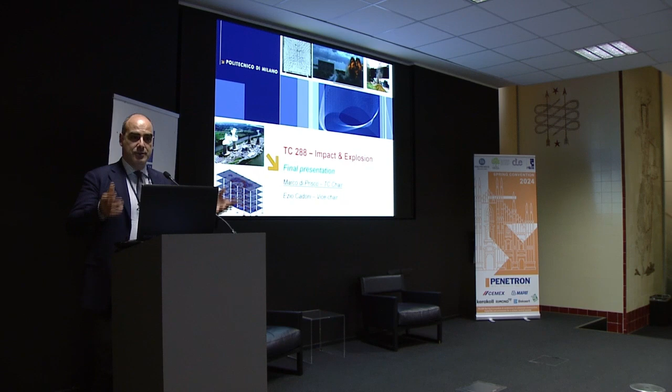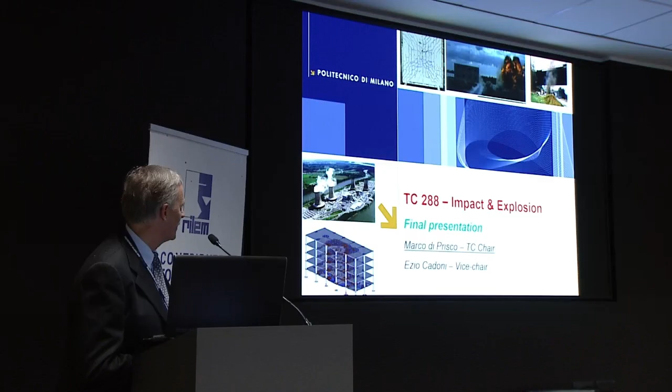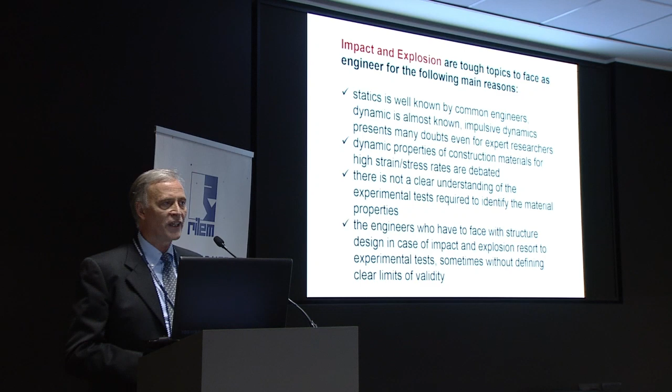And okay, I have the pleasure today to show you the job that we did inside of this technical committee. I would like also to emphasize the reason why it was born and which were the main outputs that we were able to create. First of all, looking to the subject, impact and explosion, in my opinion, everybody can immediately understand that they are a tough topic to face as an engineer.

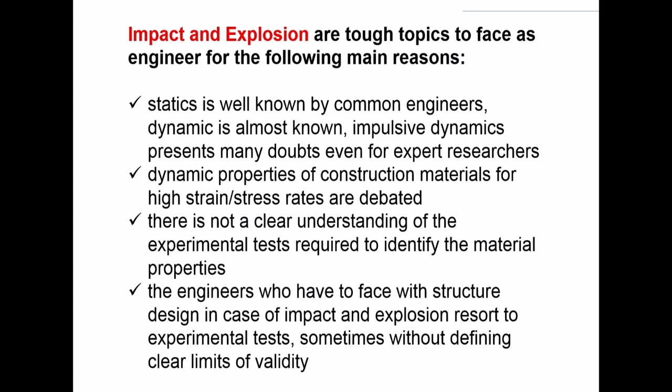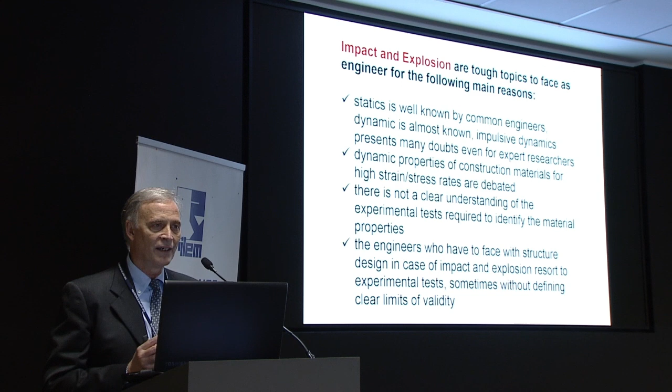And the main reason for that is that, first of all, there is relatively small knowledge, especially on impulsive dynamics, because everybody knows statics, or should know statics. Dynamics is quite well known, especially in a seismic region, but impulsive dynamics is very difficult and presents a lot of problems that are not even solved by the experts. Dynamic properties of construction materials are also strongly debated. So we are wondering what we can really identify starting from the initial test.

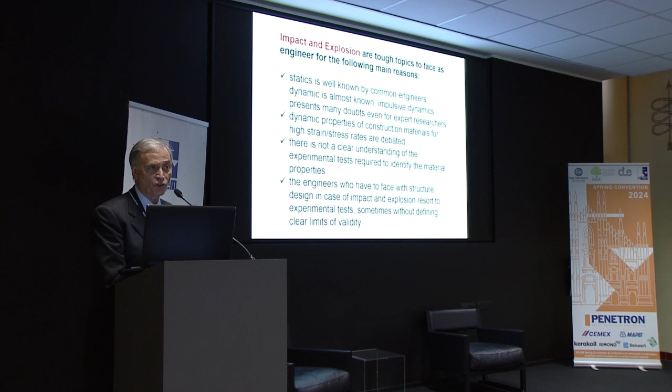And this is, as I will tell you in a few slides, for instance, one of the main problems we discussed, related to the DIF. The DIF is a ratio between the property of a material in dynamics with a high strain rate and in statics. So we will discuss it a little bit.

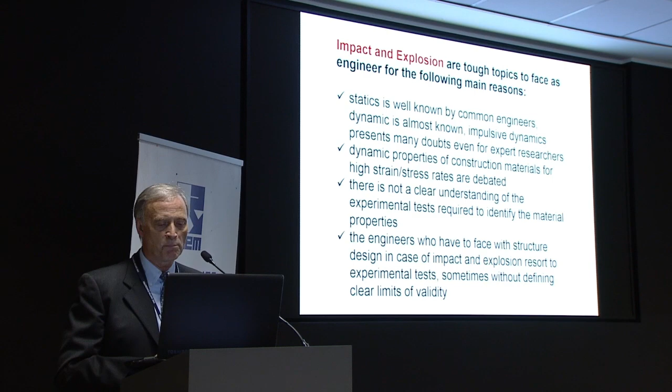And also there is a problem because at the end, as you know, the engineer has to solve the problem. So what does he do when he cannot have a reliable model? He tries. So he creates a lot of empirical laws, but in many situations, if you don't fully understand the problem, you are not able to establish the right limit of validity of what you empirically deduced. So these are the main reasons why, in our opinion, there was a need to create a committee on it, and in my opinion, RILEM could be a very good association to develop it.

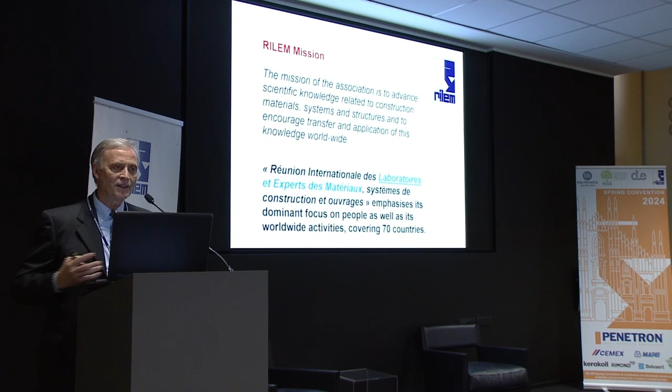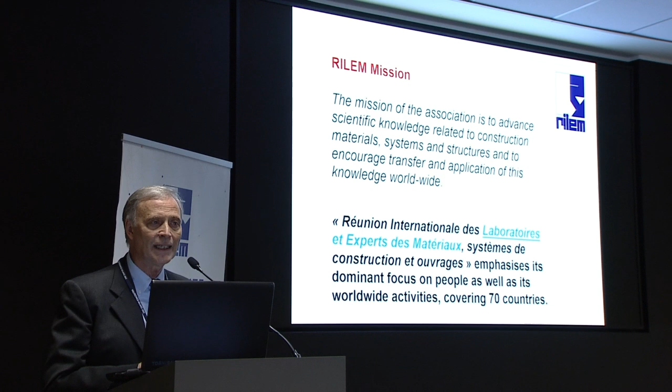I would like to remember, as Nicolas also did this morning, that RILEM is a réunion internationale des laboratoires et experts des matériaux, but des laboratoires aussi. So also laboratories. And in my opinion, until now, we developed a lot the union and the network of the experts, much less the network of the labs. And this thought was discussed with the DAC when I was inside, and was a starting point that convinced me that this topic could be a good matter in order to try to restart with the idea that RILEM could be also a good network of labs.

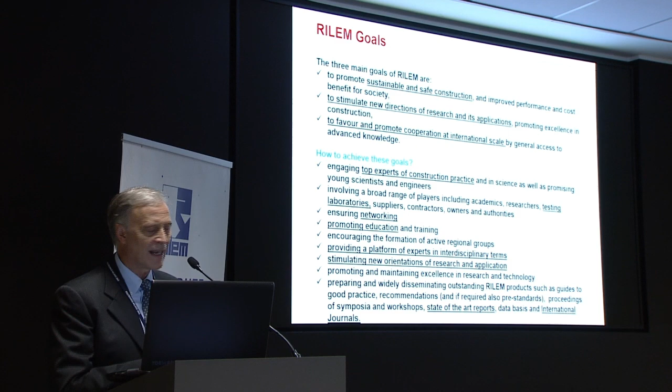As you know, the goals of RILEM also include testing laboratories, as you can see here in the underlined part. We have to promote education and networking, and we also need a way to create discussion. And what I see now is that everybody has much more money than in the past. We create a lot of experimental work. There is no discussion about it, so usually the test results are taken as they are.

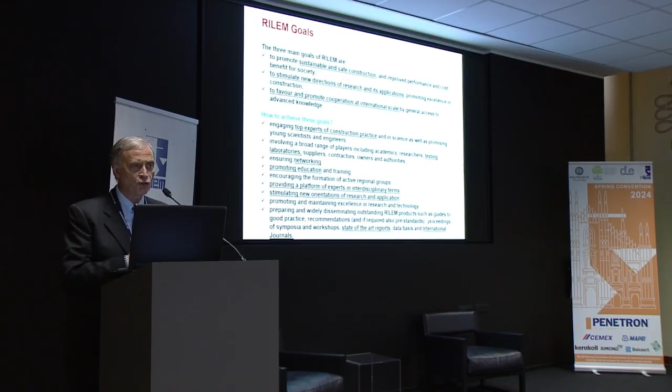In the past, we had much less money, and when I started to work in research, there was always a discussion of our job, and so the experimental results coming from one lab were discussed by everybody, because we had a much lower number of journals, and so everybody could be updated and could use the results coming from that experience. Now we create much more, but sometimes we don't have the time to read it all, and so there is a real problem with that.

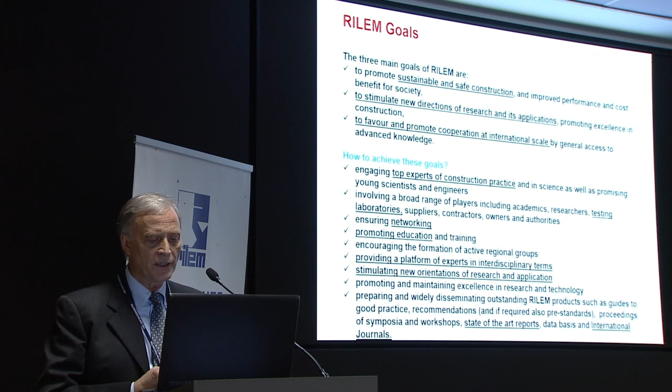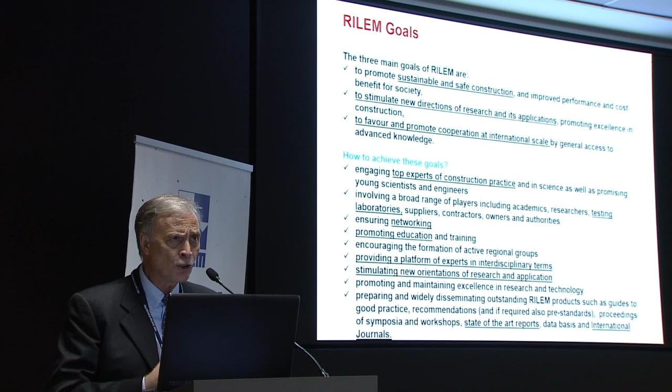And for this reason, in my opinion, RILEM should try to return to creating the network of laboratories, because instead of losing a lot of time to design a special device, as we need for such kinds of problems, it's much better to use the device that is already ready in another country. And in this way, we can also share our knowledge on the problem, and we can promote the final knowledge on the topic.

So at the end, we need to stimulate this idea and to produce state-of-the-art reports. Of course, we will also discuss that, because nowadays we don't have the best rules in order to do it. Sometimes you will be forced to produce many things only because every association would like to have a special publication in some special journal. Anyway, as you could see here, we started to think about creating a network between laboratories. So we proposed in the DAC meeting of 2018 in Delft to create this new technical committee.

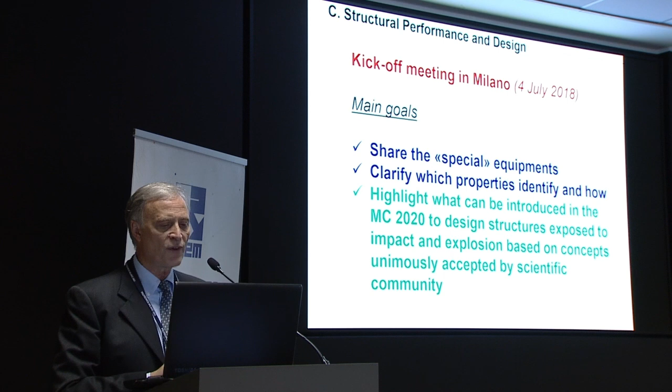And the main first goal that we announced in the kickoff meeting in Milano on the 4th of July 2018 was to share the special equipment. So I invited people who had special equipment, and we would like to discuss and clarify which properties they would be able, or they could be able, to identify with such kind of devices.

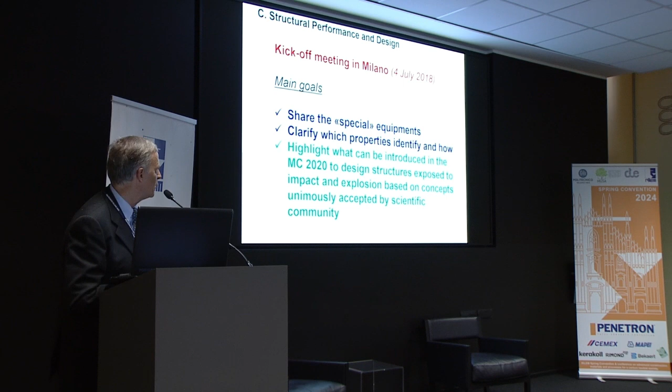And then there is also the need that, because I'm also a FIB member, I have the honor to be in the presidium of FIB, they need to create a new chapter in the Model Code 2020 on the subject of design of structures subjected to high strain load. And so immediately I thought that this could be also the good occasion to have a good number of experts that could verify if it could be possible to update what was written in the 2010 on this subject.

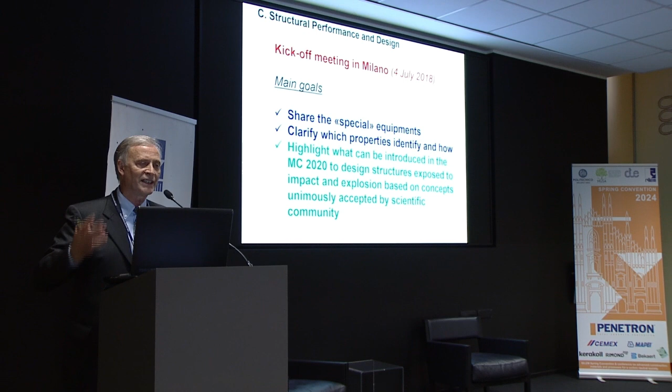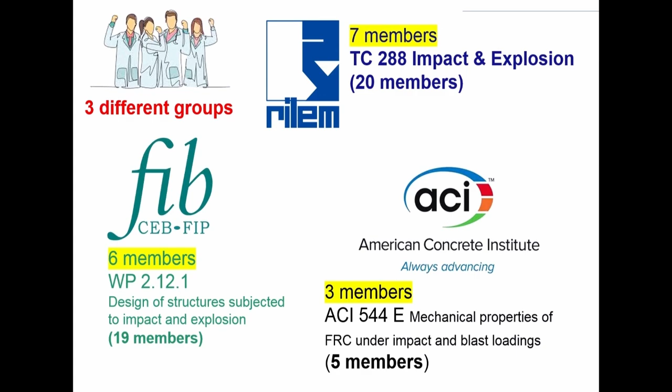Well, so at the end, I started to create a group that was not only represented by people coming from RILEM. You could see underlined the initial number of people of the 3 different associations that were FIB, ACI, and of course RILEM. And I would like to cooperate with all of them because I knew very good experts in the 3 worlds, but unfortunately they couldn't belong to all the associations.

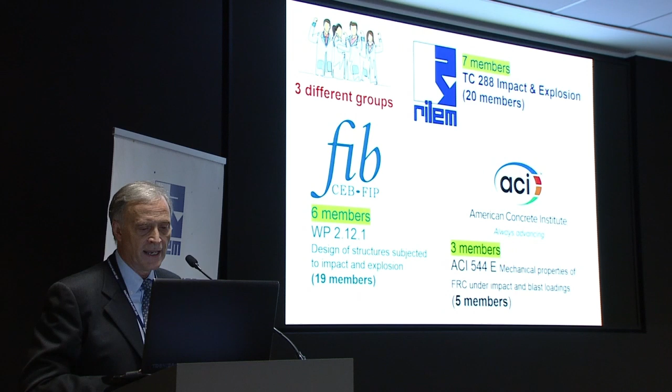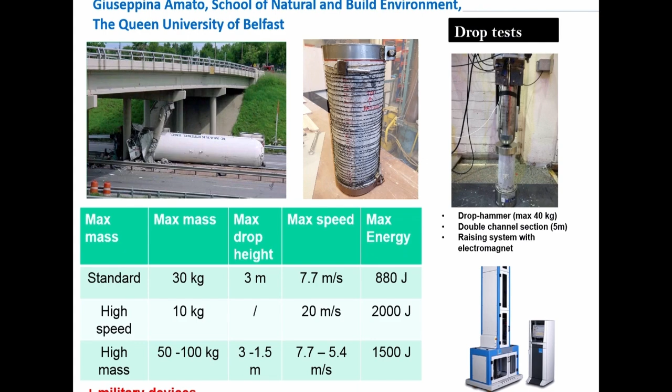So in the kickoff meeting, I asked the people to show the main problem they were interested in, and also which kind of devices they could have in their own laboratory. So for instance, we had this situation for Belfast, Queen's University, and you can see that there is a classical drop hammer. There is a double channel section, and the main problem they were investigating was essentially the impact against the bridge, so in this case the problem of the piers.

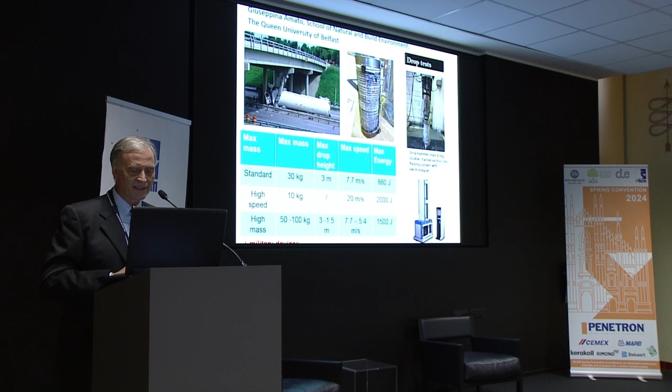And also they have some military devices, very powerful, but at the same time not so easy to use, because you know that when there is a military service, you need a lot of different guarantees in order to operate in this lab.

Then we had also Professor Ožbolt coming from Stuttgart. He was not only a very good numerical expert, because everybody knows him, I suppose, because he worked on a microplane model. He worked a lot with Professor Bažant, but he reached a fantastic level in order to study and to investigate a real problem like the anchorage, for instance.

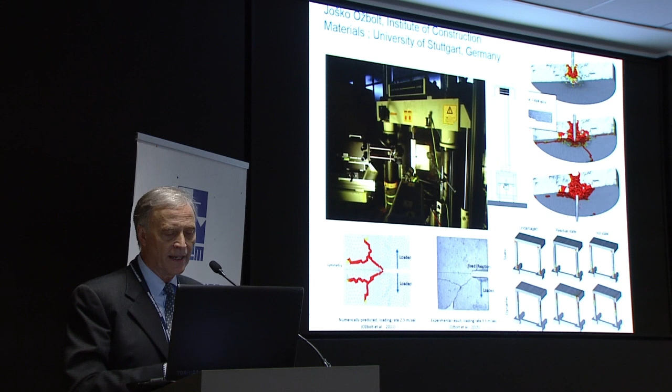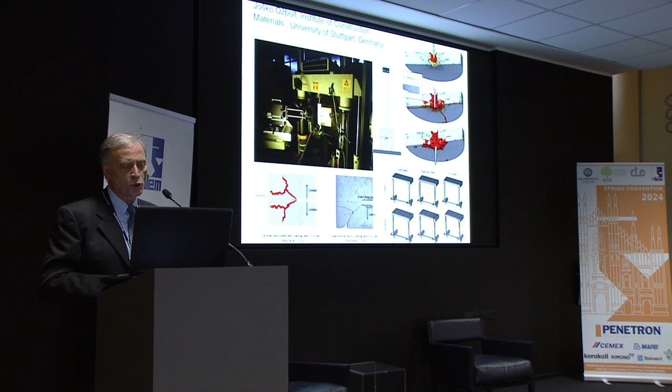And he was also interested in another problem that sometimes we have in the impact, that is a problem of fire and explosion. So, for instance, he did a fantastic job in India, trying to verify what happens if you hit a structure, so you create damage from the fire, and then you have also an impact. And I had the chance to follow this job as a supervisor of 2 PhD theses. And he has also a good diagnostic lab, working on the small scale, in Stuttgart.

We have the fantastic feature that mainly Matteo Colombo, who is inside with us in this room, designed with the help also of Paolo Martinelli. So a shock tube which is able to apply a shock wave coming at a speed higher than 2 Mach, and is able to apply a huge local pressure, essentially in the range of 1.5 megapascal, which is very huge, on a slab of about 50 centimeters, but changing the final part of this equipment, you can also enlarge the test.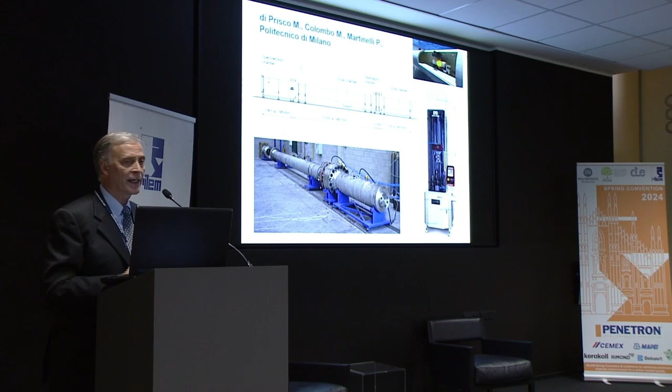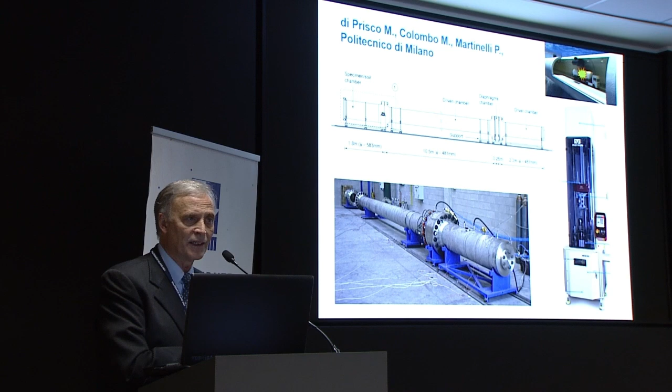And of course, this special device that we were able to finance due to an Interreg project on the safety in tunnels, it was also used recently to investigate problems like this. You know probably what happened a few years ago in Bologna. There was an accident where there was an explosion of a truck, and then there was a fall down of a span of a bridge. And we are interested for the same reason in what happens perhaps inside of a tunnel, especially if the tunnel, as we have investigated recently, is under the sea, as in Norway we are trying to do.

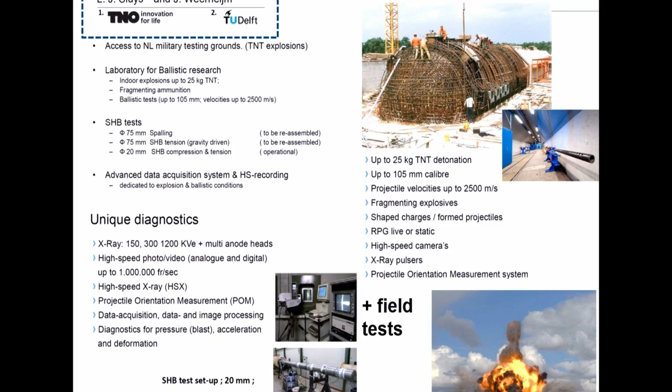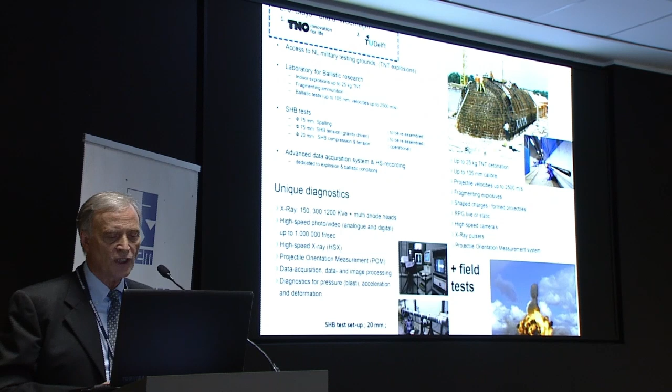And of course we have also a recent drop machine, but this is not really special, it's a market one. We have also the contribution of TNO. TNO has a huge lab. They have a very good diagnostic. They have a small Hopkinson bar, and they have also the possibility to do some field tests, which are very interesting, because they can use some devices in agreement with the military service.

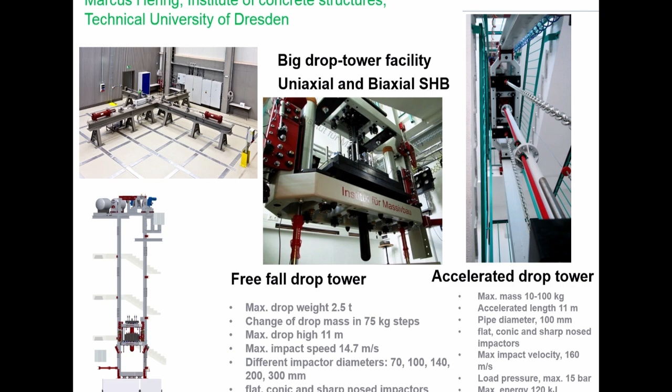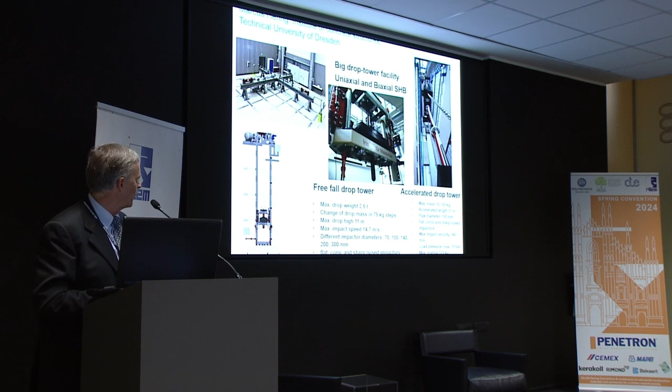Well, anyway, we had the contribution of Dresden. Dresden created a huge mass to use as the classical big drop tower facility. And it tested a huge slab for punching. So this is a very important device for the investigation on impact. And they have also a very important uniaxial and biaxial split Hopkinson bar that you can see here. Okay, it's not possible to see there, probably in this way. Yeah. And okay, so this is what they have in Dresden.

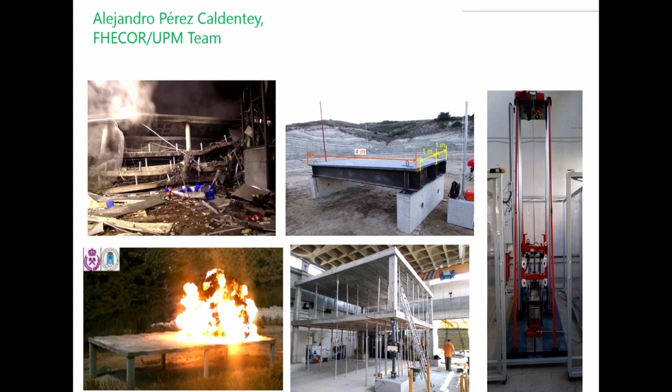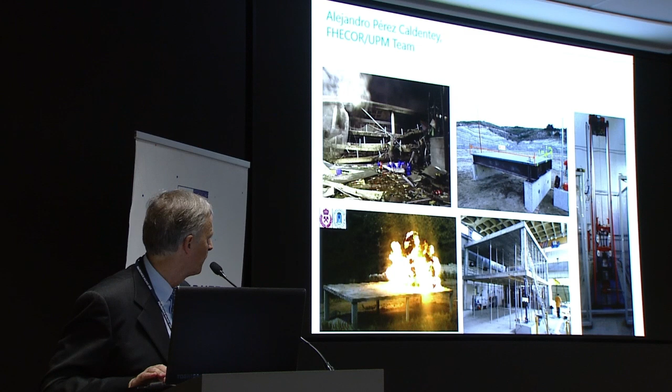And finally, we have also the contribution at the beginning from Madrid, where Alejandro Caldentey had the possibility to investigate real problems as engineer, but also full-scale tests outside or inside to evaluate robustness and the behavior after damage in fire.

So at the end, after this first kickoff meeting, we decided the final aim of our technical committee, essentially 5 aims. The first was to coordinate a database for special devices oriented to investigate impact and explosion effects on materials and structures. The second was to introduce state-of-the-art knowledge in a specific FIB bulletin, and so we did. Now we have a bulletin ready, and we will submit in a few months.

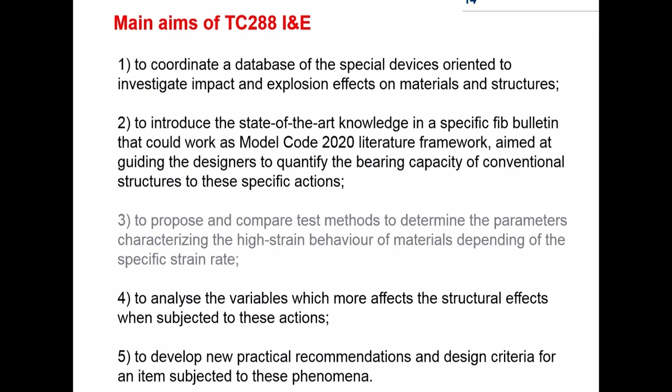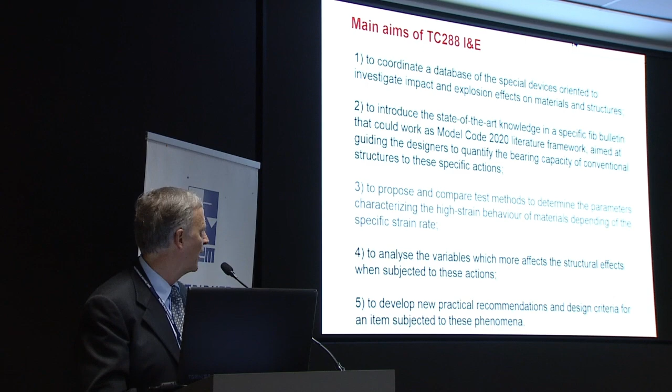That works as a framework for the chapter we wrote for the Model Code 2020. Then we had the possibility to discuss and compare different test methods to determine the parameters characterizing high strain rate behavior. We did this job with ACI 544, which is specialized on the behavior of fiber reinforced concrete used to protect structures. They created a very interesting state of the art, and we debated about it.

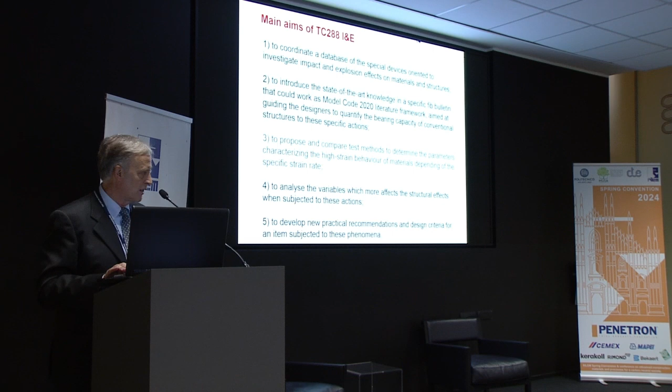We also had the possibility to analyze the variables which most affect the structural effects, and this was essential in order to select the right procedure or the right level of design to adopt in different situations. And finally, to develop new practical recommendations and design criteria. This is something we propose at the end for RILEM, and we have already written it, so we will submit the state-of-the-art to Materials and Structures in a few days.

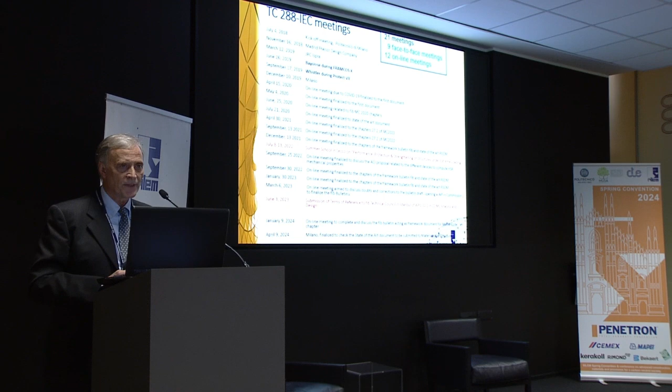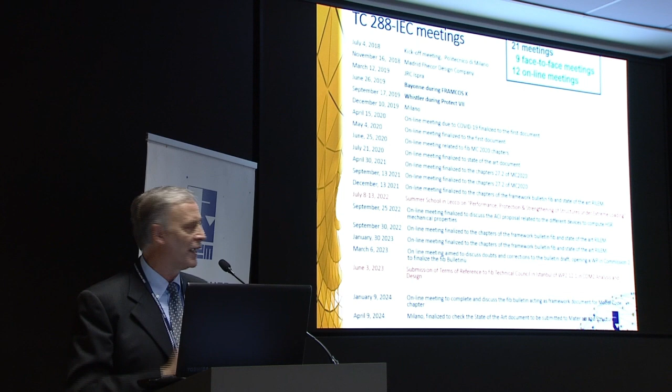As you can see, we did a lot of meetings, especially at the beginning, in order to best clarify the aims. Globally we had 21 meetings, 9 face-to-face, then there was the pandemic, so we started to use online. Now I'm convinced that for a technical committee it's a good idea to have one face-to-face, perhaps here, and one or more online, because otherwise the cost of our technical committee is too high. And if we look at the sustainability of this type of organization, in my opinion this is the best approach.

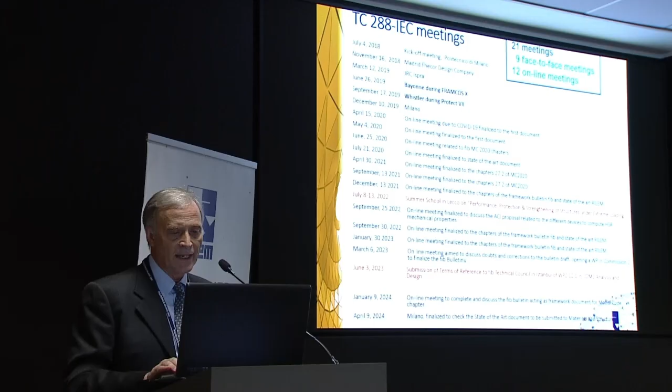We arrived at a global number of people which was more than 40 people globally. A huge job was carried out by Ezio Cadoni, who served as vice chair of this committee, and is a very good expert in terms of high strain rate behavior of materials.

We started with the first output, the idea to create a network of labs, and we produced in 2020 a first report where we were able to describe 27 different devices that could be useful to identify the high strain rate behavior of materials. We created a document where you can see for which kind of problem this type of device was used, with references, of course.

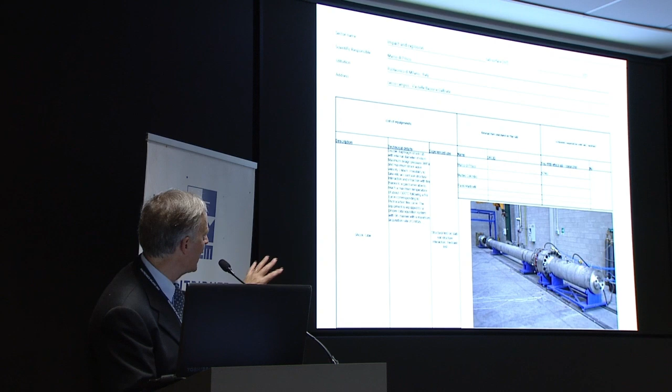And we created also an Excel file where you find all the main information that allows you to contact the people who really have the possibility to organize your job if you want to work with them on a special subject.

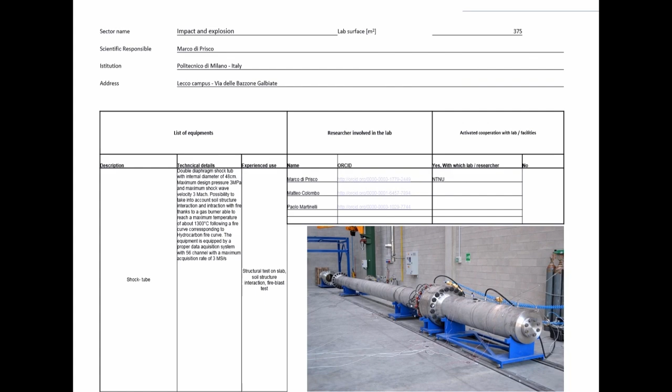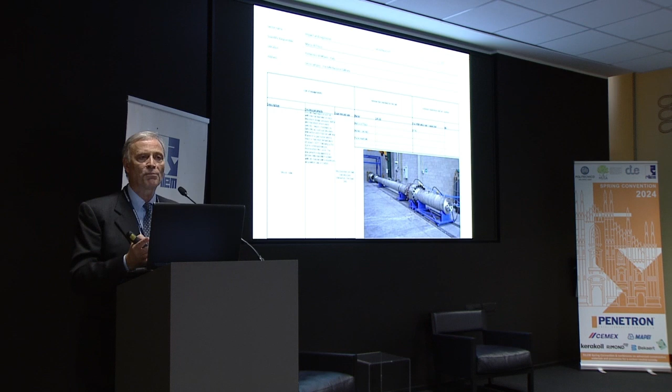You have to remember that in many situations you create a fantastic device. It takes you 2, 3, 4 years. You use it for 1 or 2 years, then you lose the person who started this job, and the university in many situations needs the space, so you lose everything because you don't have people who can continue to work. So the network is very important for this reason, because we need to use this type of device in a fast way. Sometimes when we started, we worked around 2.5 years in order to have the device ready, but if you can use it immediately, it's a different story, and you can discuss right away with the person who is an expert on this device.

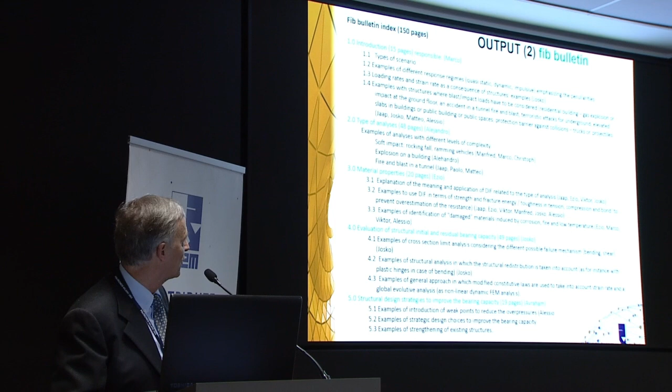Then, speaking about output 2, the fib bulletin, we have a bulletin with 5 chapters, and this was a very important subject, because on this topic there are different ideas. I would like to return mainly to one concept which is very important.

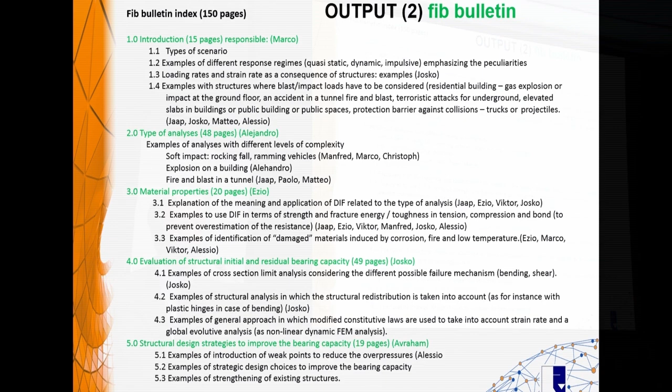First of all, we need to clarify together how to align this type of design with the new rules of Model Code, which is characterized by different levels of refinement. So we should define which type of analysis could be correlated to the right level, and this is not easy. This was strongly debated.

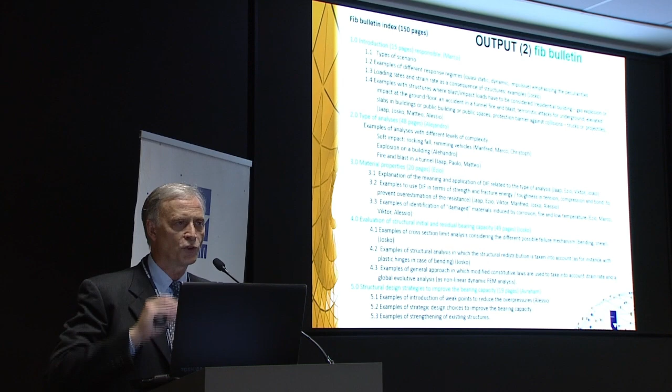Because if you think even about the simple constitutive law for compression, uniaxial compression in a cube, if you look inside the mesostructure, you know that you can simulate all that happens. You have to introduce the heterogeneities, you can look at the material as a multi-phase material, and at the end perhaps you are able to reproduce all the details of what happens, but there is always a scale to accept. And according to the model we select at the beginning, we probably need to define a different approach.

So it's not so easy to define a unique DIF, because a DIF is something that is able to correlate the model and the scale that you are adopting to the test that you are using to identify that property. So we discussed a lot on this. Even now there are some different opinions, but at the end everybody converged on this idea.

And in the model code there is a huge change, because in the past the DIF was essentially a two-branch equation. There was a beginning in a semilog graph, a linear behavior, and then something that completely changed the slope, and nowadays it's just linear. Why? Because some aspect correlated to the inertia was considered not part of the constitutive law, but was outside. And we discussed about it.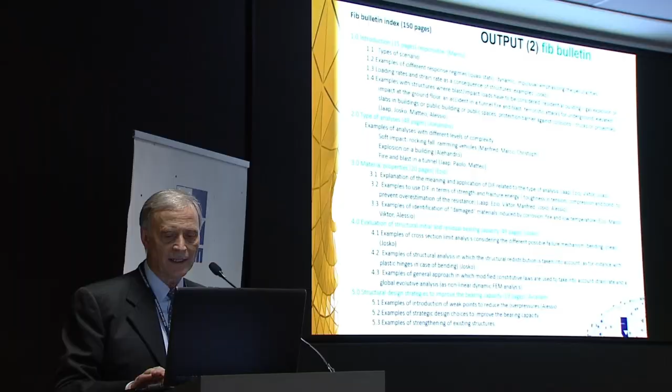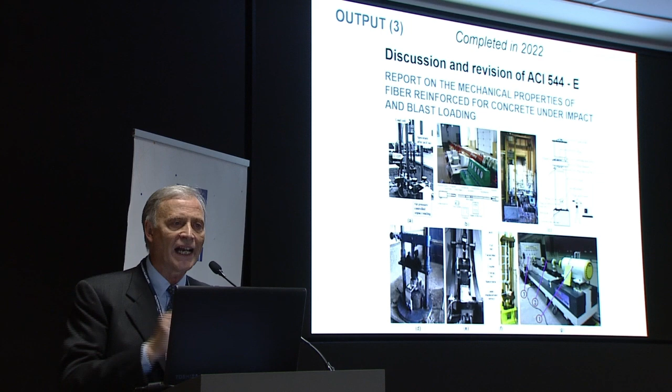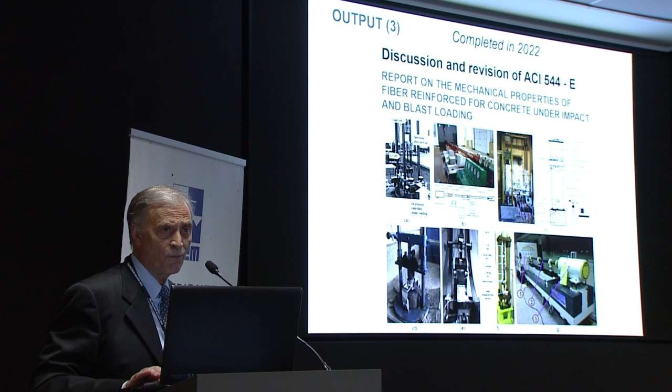And you can find different references inside of the FIB bulletin. The ACI 544 tried to compare the results on fiber reinforced concrete obtained by different types of equipment. As you know, it's not so easy, because when there is also fast dynamics, you have to know where the energy is oriented. You don't have only energy inside of the specimen, but you could have energy inside of the support or other parts. So this is a real problem, and there is not nowadays a full agreement on this point.

But the state of the art that was published in ACI, in my opinion, and we reviewed, is quite interesting and tries to be a real state of the art on the subject.

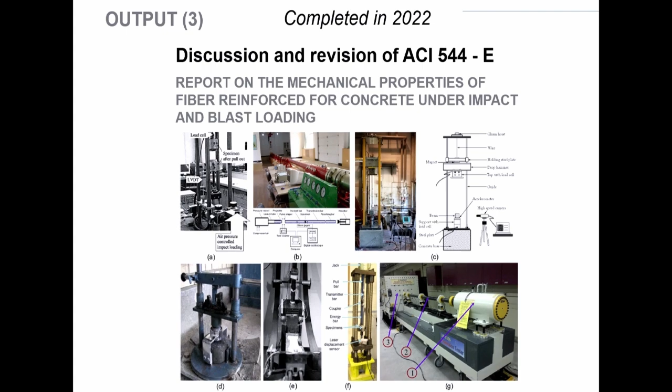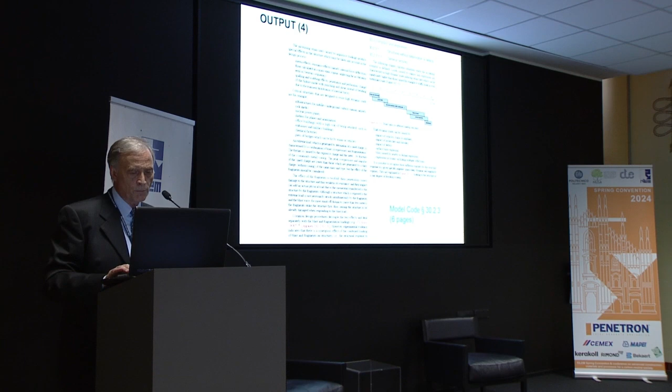In output 4, we had chapter 30.2.3 that in the model code was able to align the different levels of design and discuss, for instance, that it's not only a problem of strain rate, but sometimes it's a stress or strain rate, and it depends how you measure it. So this is something that was clarified.

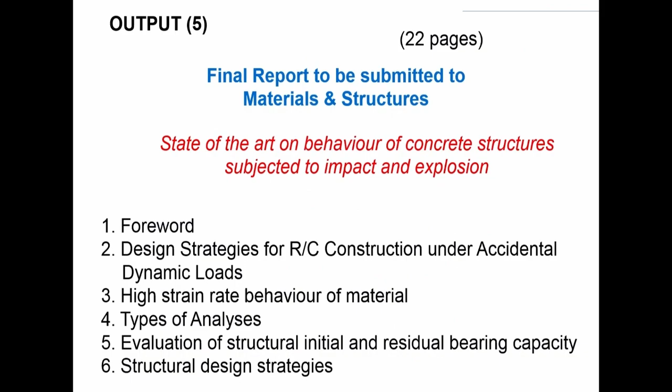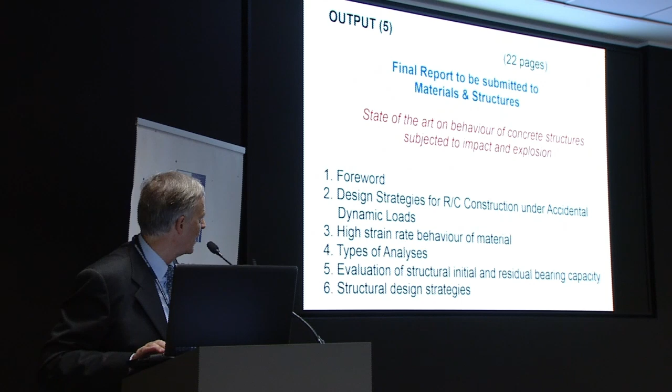We also had the final report we wrote in the last months, and so we will have a state of the art published on Materials and Structures that resumes the most important basic discussions that we did in the committee. We were forced also to diffuse a little bit our discussion and knowledge on the subject.

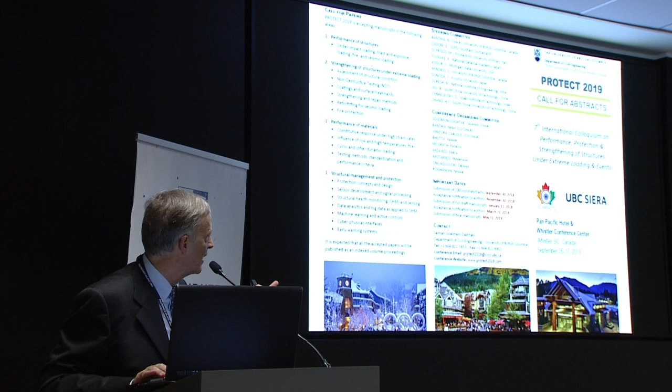So we participated in Protect 2019. I remind everybody that even this year there is another Protect in Singapore in August, which is a very important conference on this.

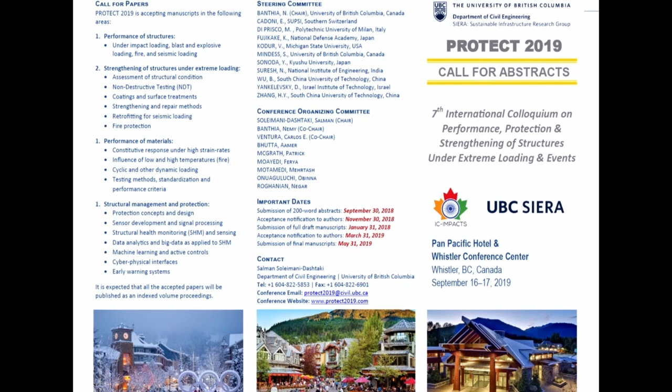We tried to organize also some summer school with the help of experts on impact and explosion. This was, in my opinion, a good occasion also to discuss between us, with, of course, some good socialization time. And we tried, at the end of this summer school, to create a test for the students.

They should try to use what we taught them. And at the same time, we verified the ability to face a problem of impact, even for a simple case like a plate. This is also something that could be interesting probably in the future to publish as a result of what we taught.

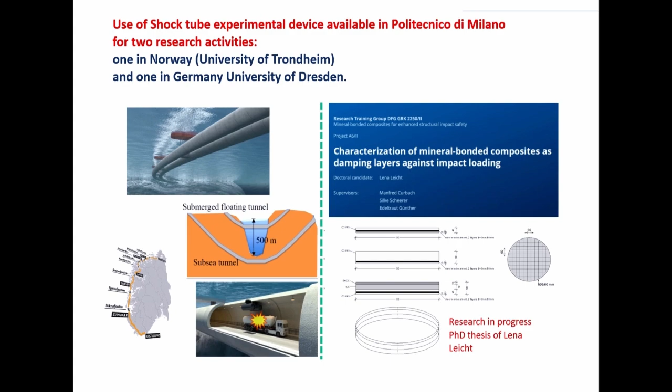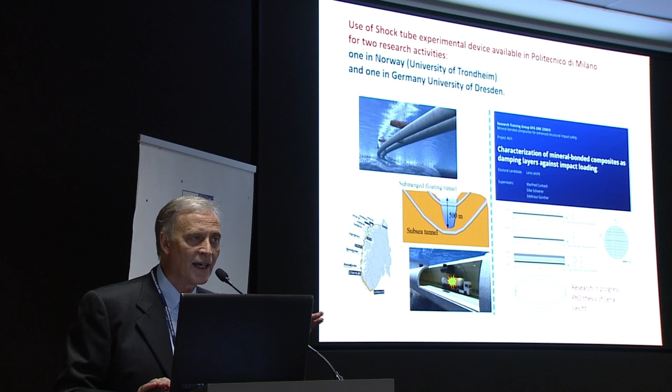We had the possibility to use this group also to share PhD theses together, to create a network. For instance, in our group in Lecco, we had the possibility to investigate with people coming from Norway the problem of fire and blast, and with people coming from Dresden, the use of high-performance fiber-reinforced concrete material with mesh that are not metallic, in order to see which is the behavior under impact.

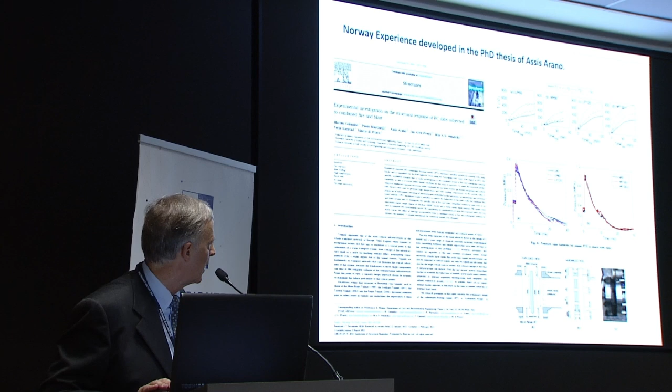And so we arrived at the end; for the first case already a journal publication, and for the second we are working on it, and this was a lady who worked with us. Okay, so that's all.

I would like just to remark that, in my opinion, we need to simplify more the possibility to work together.

I already discussed yesterday that FIB, but also RILEM, I discovered, accept reciprocity, so this is very important. Essentially, if I create a task group and I need an expert that comes from another association, he can have the possibility to work with us, sharing also the document. The only problem is that they cannot be the authors of the publication that goes as a RILEM publication if they are not, for instance, experts of RILEM.

The same idea is for FIB, so I invite everybody, and especially the convener of the technical committee of RILEM, to share as much as possible the groups, because even if RILEM is very wide, in my opinion, it is much more concentrated on basic research, and we need to combine the basic with the design. So this is, in my opinion, one of the main ideas that we have to push in our technical committee in the future. Thank you for your attention.